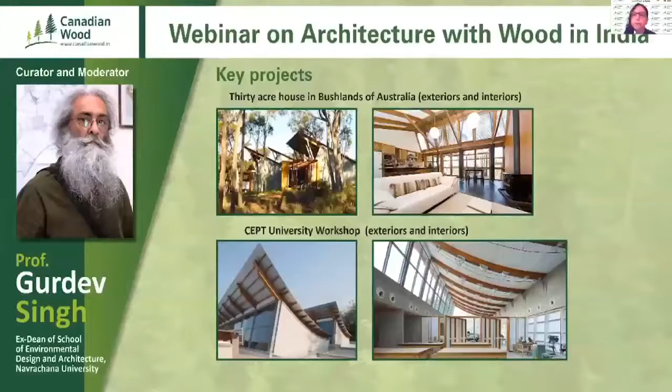Thank you, Pranesh. It's a pleasure for me to be the curator and moderator of this prestigious webinar with such illustrious personalities from my fraternity on the panel. Despite my engagement with Canadian Wood over past 5 years, it was very enlightening for me to listen to the address by Honorable Andrew Smith and note that thoughtful work is being done by Canada on sustainable forestry and growth of trade ties between Canada and India.

I, along with the registered audience, look forward to the very interesting next 45 minutes of highly informative presentations of 15 minutes each by the panelists, which will be followed by 30 minutes of panel discussion, and finally concluded with roughly half an hour of question and answer session with the audience.

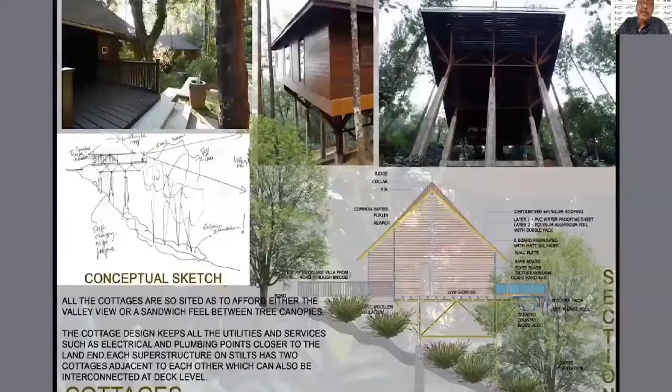You can see that this is made of Canadian wood, the softwood: pine, spruce, Douglas fir, and cedar. This is a project I did with Canadian wood 12 years back. All these cottages, as you stand on the deck, you are very near to the foliage of the tree. That is the beauty of this project, and that is why we won quite a lot of awards.

We got this timber from Canada into China, and from China into India. There was a stream, and I created this resort hotel with the central block spanning the stream as a bridge block. Probably this is one of the first projects in Asia where an entire 5-star resort hotel is on a bridge, so my footprint is not even 0.016 - the least among hotels in the world.

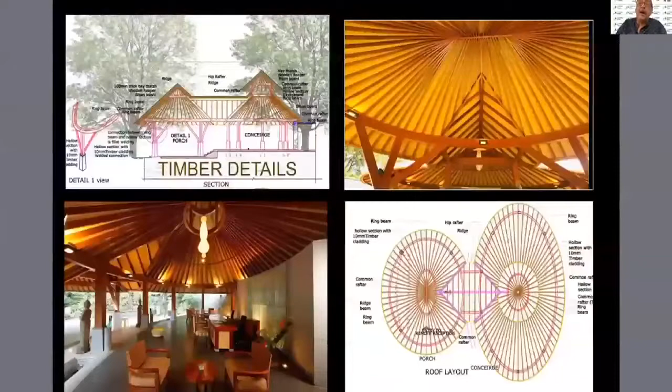In the cottages, you are very near the tree, very near the birds. That is the beauty of having softwood. You can again see the reception block here, and this is the internal of the bridge block. You can see a glass floor at the bottom - the bridge block spans like a bridge, with a glass floor for the restaurant and the lobby.

Now I come to the Tamara Kodai, which is a conservation project in 7 acres of land in Kodaikanal, Tamil Nadu. This is a heritage project, and we have got a lot of awards for this also, because it is a heritage adaptive project - not only conservation, but adaptive reuse.

I'm sorry, not pre-adaptive, adaptive reuse. We have conserved and reused it - adapted the conservation to reuse. So you can see that...

If you see the interior, we got all this timber pre-engineered and shipped from Indonesia, in Jepara near Semarang, and brought it here. We had to make 300 timber drawings, as you can see. In this project, we used antique finish timber, but this is not softwood, this is hardwood.

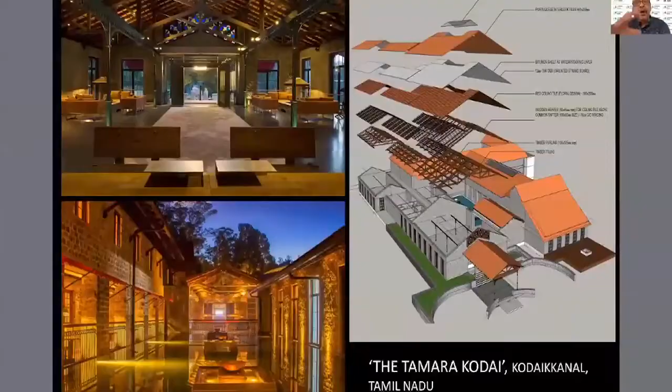And you can see the interior. This was a chapel, originally a monastery. In this Kodai project, we conserved a monastic building and made it adaptively reused - this was a chapel which has become a restaurant.

You can see that we tried to retain all the existing walls with lime plaster and retain the rubble. We have used a lot of stained glass to create the ambience.

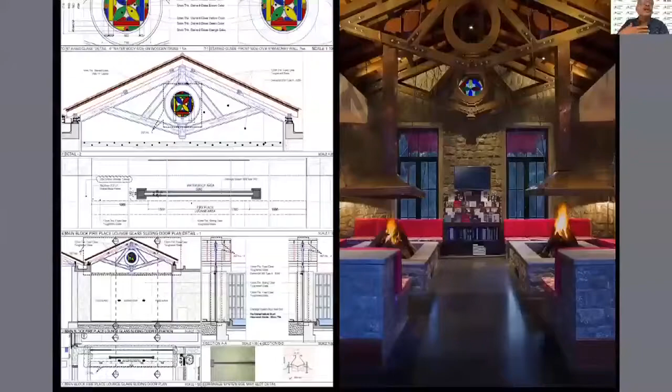What I'm trying to say is that this can be done provided we apply our mind on conservation, and conservation and timber are good cousins, because most conservation buildings are made out of timber. So I recommend all architects, clients, and builders in India to go back to timber, create light structures. Even a Western rich country like Europe or America is using timber. We in India are using heavy walls and heavy concrete or stone roofs. We should get back to timber.

That is my mantra. I will now come to the last item of my presentation - this is about using Canadian wood.

My wife, Lata Mahesh, is one of the world's biggest collectors of bells. Her hobby is collecting bells over the last 20 years, and this is the only bell museum in the world - in my garden, in my house. You can see a rock on the right side, with the bell museum at the foot of it.

This is the only bell museum in the world. You can see the Canadian wood - the FII gave us timber, and we built the entire museum with steel frames and timber. We used red cedar outside, Douglas fir and Western hemlock inside, and the framework was made of spruce, pine, and fir (SPF). This is a project where I used only timber - no cement paint, no wall, no masonry, nothing.

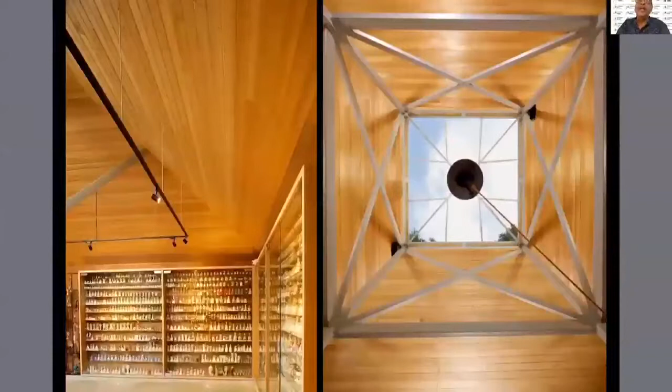We have also treated this with water-based polyurethane and termite control using Bayer termite control chemical, so I hope this will stay for 30, 50, 70 years. I may not be there, but my wife's Bell Museum will be.

As we all know, wood is God's own building material - renewable, sustainable, with a negative carbon footprint, and biodegradable. We in the Indian subcontinent have had a long historical tradition of building with wood, all the way down south to Kerala, the coastal belt, into the hills - Himachal, Bhutan, Nepal, etc. We have palaces, temples, and dzongs 400 to 500 years old. Now we need to revive this tradition all over again.

There has been a global resurgence of building with wood. The ecosystem for wood construction in India is now in place through educated vendors, structural engineers, and proof consultants. Building in wood is not only cost effective but also lightweight and easier to construct under adverse working conditions.

My presentation today is for the young architects and students aspiring to build in wood. We will be sharing our journey of design, the thought process, construction, and details in this presentation. For easier understanding, I have classified our projects under three heads covering various typologies: small span structures, essentially residential in nature; medium spans, which are institutional projects; and large span structures, 15 meters and above.

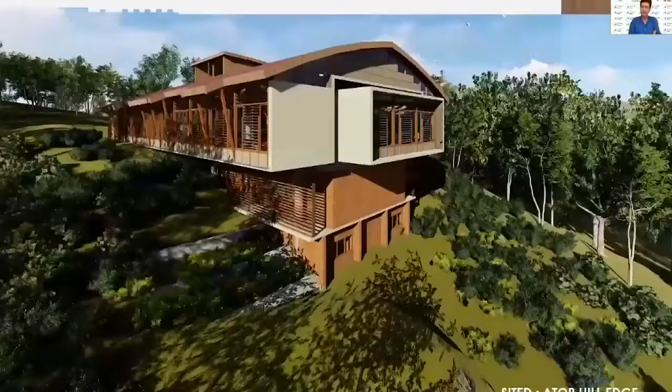This is how the building sits atop the hill edge, with two levels for the laundry and the kitchen below, and the main dining hall at the top. That's where timber lends a distinct character to the building.

This dining hall is for 600 plus diners, including 600 students plus teachers. Now, in contrast, I'll share the dining hall at the Royal Academy, Bhutan, which is a 30 meter by 75 meter structure for 1200 diners.

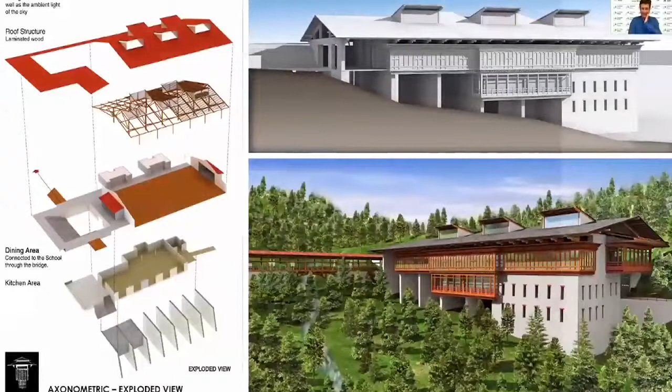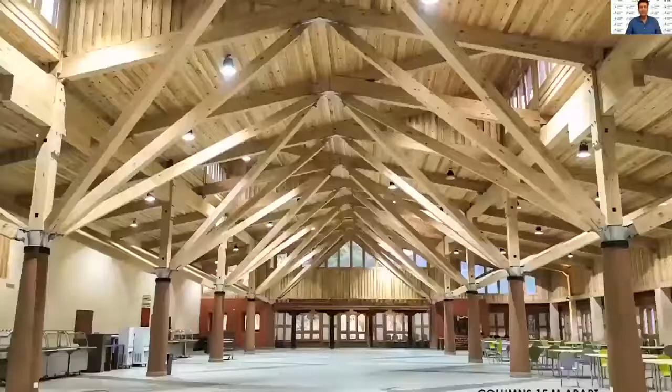Here we go ahead. Here is the service entry from the rear, and with the dining hall at the upper level, the main entry into the dining hall for 1200 diners. Here the columns are 15 meters apart, and also through the middle we take in the light.

The middle section of the roof also permits ventilation, and this twin level of height gives a very nice volumetric dimension to the space. There are 6 petals that hold the entire ceiling with one compression member, as you can see in the middle, holding the main beam.

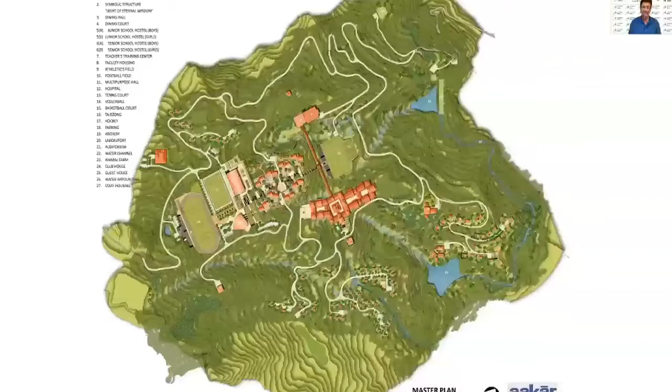Now the academic building at the Royal Academy, as part of the large span structures - here we have a 260-acre campus with all its components, as you can see on the site plan. An aerial view of the same campus under construction as we land into Paro Airport.

This is how the main academic core nestles in nature, atop the mountain ridge, with a suitable climatic orientation - the longer sides along the north and south. This is what you term as harmony with nature.

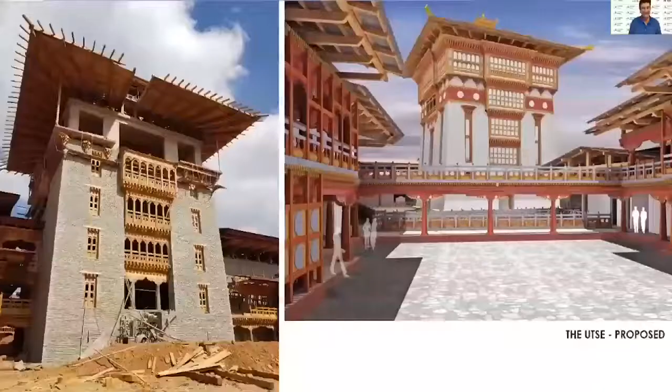Now, the main building, the Utse building, is 7 floors high at the core of the academic core. What you see on the right is the proposed Utse, while on the left is the building under construction. This photograph is about 6 months old.

And the build has surpassed our expectations. You can see the large oversized roof in engineered timber.

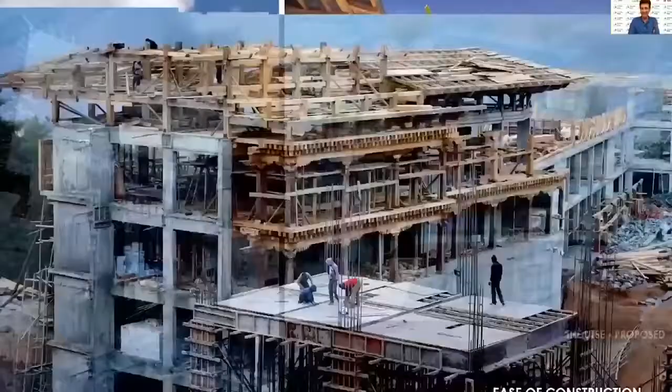Now I wish to emphasize the ease of construction here, where while the concreting has just got over, the roof structure is in place. The inner courtyards, corridors, etc. done in timber are all in place, while the podium concreting is in progress.

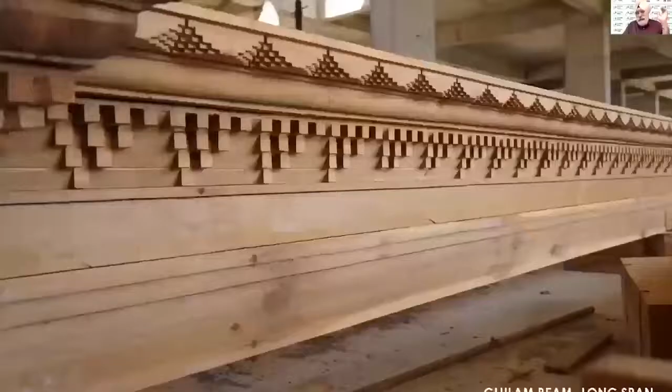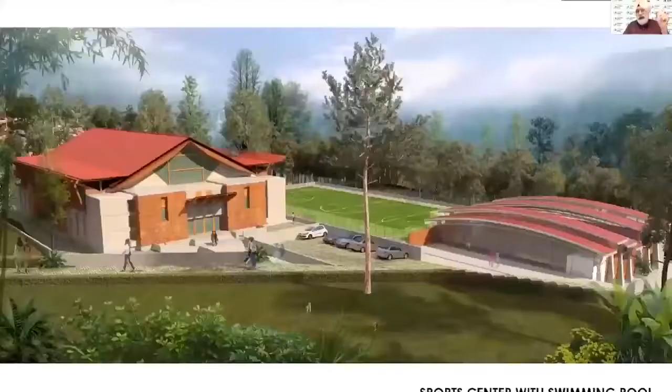Now I will come to the sports center at the World Environment School, which is a large span structure, 50 meters by 75 meters. In fact, we've designed two structures - we'll keep one for another webinar. I'll focus on the one on the left that we see as the sports center.

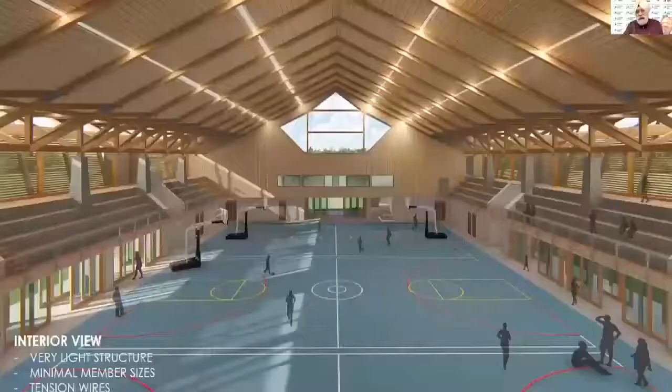Here there are some study models and the alternative study models that were proposed. Now you can get an interior view of how light the structure is with minimal member sizes and tension wires which are barely visible.

Acoustics and inbuilt lighting in a timber structure is never a challenge. It's very easy and helpful.

On the left, you will see the louvers. Here, the loose end of the truss has been used as a tension member to provide for these louvers, making it a strong architectural element.

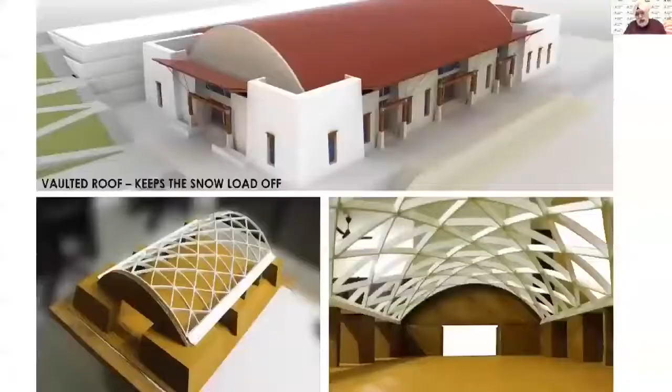Now, the multipurpose hall at Royal Academy, Bhutan, which is a 50 meter by 75 meter structure, again encompassing 3 basketball courts. Here we used a vaulted roof to keep the snow load off. Some study models of the lattice work that we proposed at the building under construction at site presently. This will give you an idea about the large scale inside space that we have.

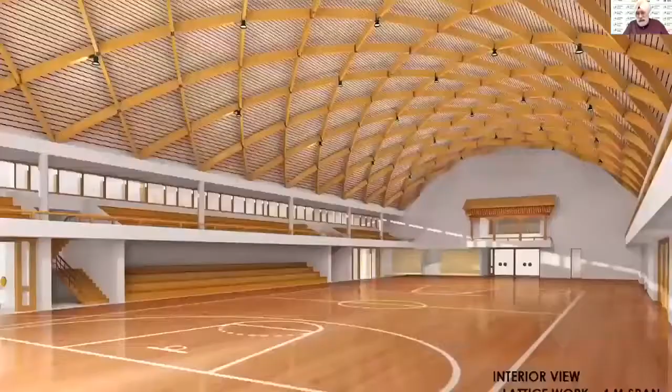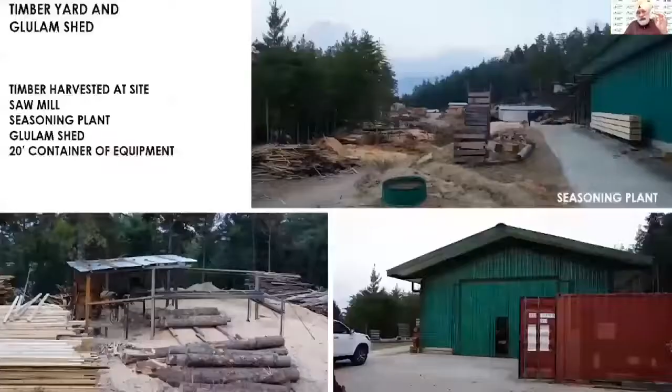Now, this entire glue lamination for the Royal Academy Bhutan was done at site. I will share the entire process of timber being harvested at site, to a sawmill, to a seasoning plant, to the glulam shed. All we got was a 20-foot container of equipment from Switzerland to help us through this entire glue lamination and engineered wood processes. You see the timber yard, you see the sawmill, and this is the inside of our glue lam plant.

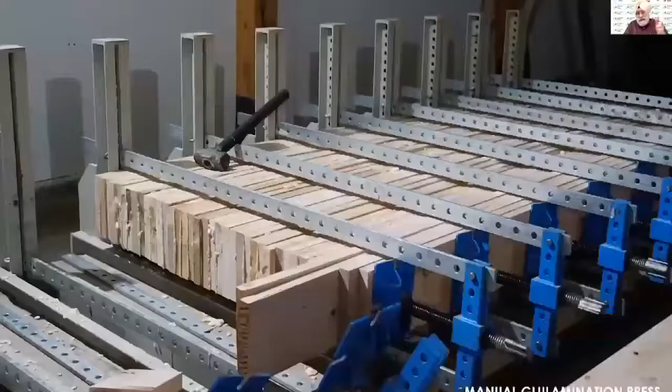This is a jig in place, all manually done, which also helped us curve. You can see the depth of the beam being formed, and we could do the curved members also here on the same jig. A very rudimentary humidity and temperature control mechanism with glues, etc. Here what you see is the members stacked for the multi-purpose hall with human scale. You will see the curved members that are there, which adds to the complexity of the multi-purpose hall with the steel connectors, etc.

Pine laminas, so beautiful, so aesthetic.

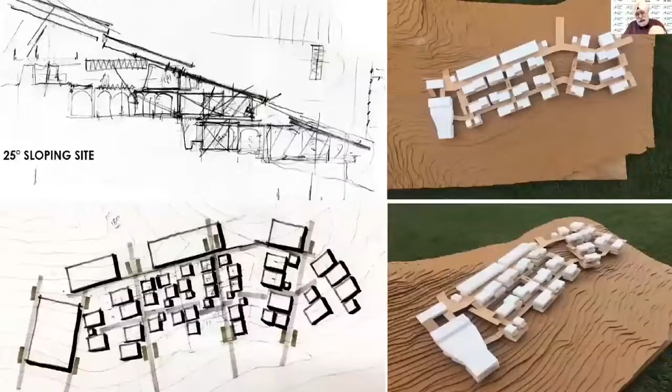Now I'll come to the medium span structures at the academic building at the World Environment School, a very contemporary gesture. This is on a 25-degree sloping site, very modular in units, classrooms, and models, and this will give you an idea as to the profile and the roof profile in section, where our slopes are south facing and all our roofs are south facing. We've taken advantage of this, minimizing the cut and fill.

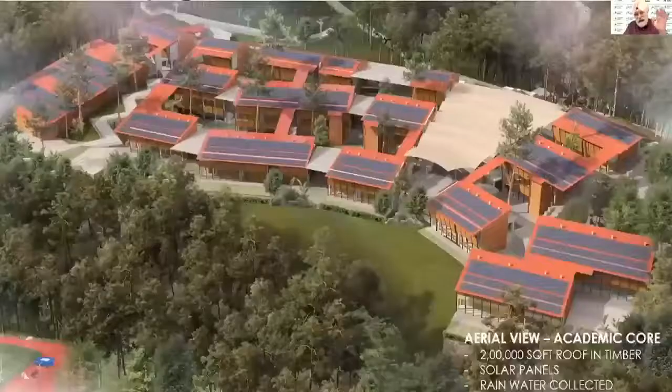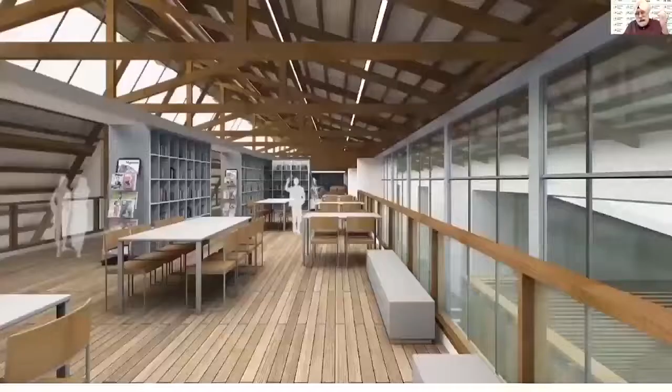This roof structure of our academic core is about 2 lakh square feet. It has enough solar panels for our energy needs. We collect enough rainwater for our annual requirements. This is punctuated with courtyards to save on existing trees. It also encompasses between building blocks a 1,200-seater amphitheater, again done in timber. Courtyards with timber louvers, the library with a long running north light all along the edge of the building.

The materials used essentially are two. One is locally quarried laterite along with timber, which give it a distinct character and an identity to the project. Here in this project, because the classrooms are all modular in nature, a 10 meter by 10 meter kind of a space.

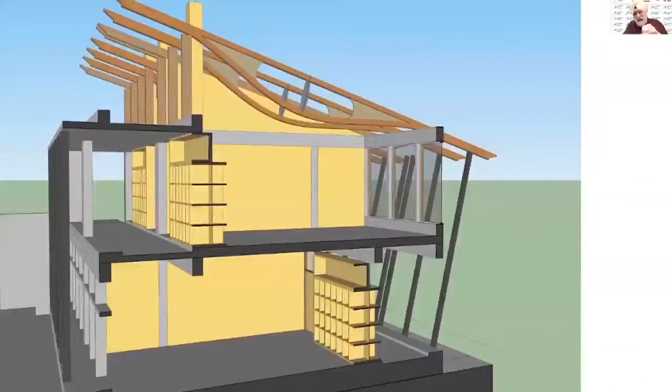So we developed a truss here with 3 meter overhangs on either side. Overall, it's a 16-meter long truss where the shear members are thicker in dimension, where the shear forces are at the edges, while the center takes a steel plate for the compression members. So we developed this truss which adds to the architectural beauty and interior spaces. It also gives a very distinguished identity to the project. Here what you see is an extension of the same truss spanning 20 meters across.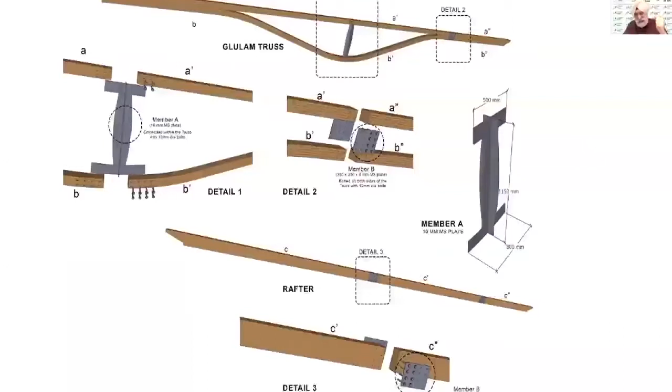Now these glue lam trusses that we were doing, we talked to our structural consultant. He wanted a sectional size of 9 inches by 9 inches in the middle and 9 inches by 18 inches at the edges, which we felt was very heavy and very visually not acceptable to us. Pushed to the wall, we decided to do a real scale model, full scale model at the office itself.

You can see the jig and the turn buckles where these two girls are at work making this truss. That's our team at the office, load testing and deflection tests being conducted on this truss. I am happy to share with you that we could finally get our structural engineer to agree on a size of 5 inches by 5 inches, thereby minimizing the component and bringing down the cost of this truss also.

Because 9 into 9 is 81 versus 25, which is 3 times the saving in material and components.

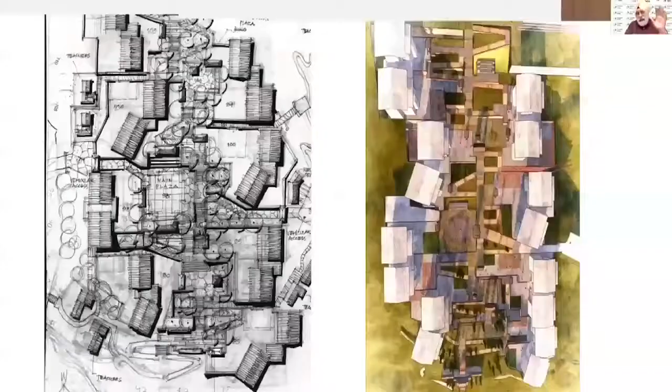Now I'll come to the student housing at the Royal Academy, Bhutan, which is a medium span structure. Again, a sketch of the site plan. This aerial picture will give you an idea about the site and the terrain, with the boys' hostels on one side and the girls' hostels lined up on the other side.

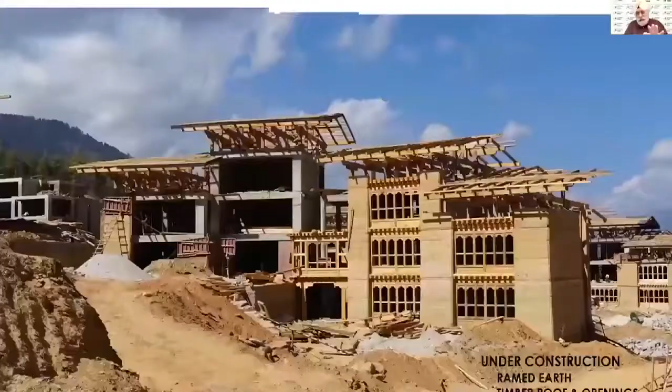Here, the study model indicates how we've negotiated slopes within a built block. That's the built block under construction, with rammed earth and timber roof structure with large timber openings. Engineered wood has been used for longer spans, while shorter spans are in lumber. That's the student housing finished, with a south-facing facade and large openings.

That's our block. It's a good local aesthetic with rammed earth and timber. Same blocks, boys' hostel, with the girls' hostels across the courtyard, the north side taking on the stone walls. This will give you an idea about the slopes that we've negotiated with each terrace for each two blocks.

Now I'll come to the small span structures, the last component in our presentation, which is the faculty housing at the Royal Academy. We had 120 houses to build on account of teacher training and curriculum development. So these have been split into 3 villages.

Here is an idea giving you a look and feel of one such village, with south-facing rammed earth walls and in-between spaces. We used stone walls on the north side, which also took the kitchen and all the services, with the rammed earth on the south side with large openings to again permit sunlight. That's a view of the large overhang roof, how it protects the balconies.

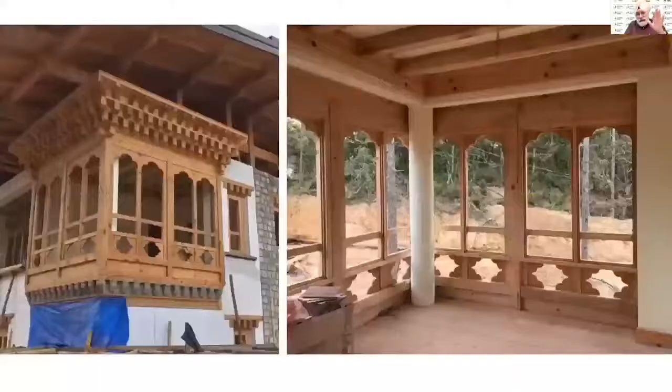Traditionally crafted large overhang roofs with its bells and whistles all in place. Now, this is green wood used on the exterior for carving as well as on the interior for spaces.

Now I'll share a CLT. This is a different project, the retrofitting of an office building on Annie Besant Road, Bombay. Here we used a 1.5 meter panel cut along this profile, as you see, A and B as a negative and a positive profile.

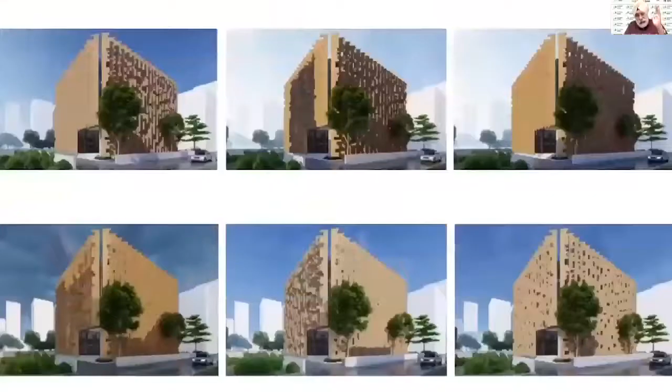The positive profiles help keep the sun out, while the negative profiles are on the favorable side, that is the north and the south. This is how it will help you understand how the shading devices work, while these louvers give shade while letting the views and vistas come through the building.

Now, our journey of timber began with this house in Himachal at 7,500 feet. This site overlooks a valley and a village.

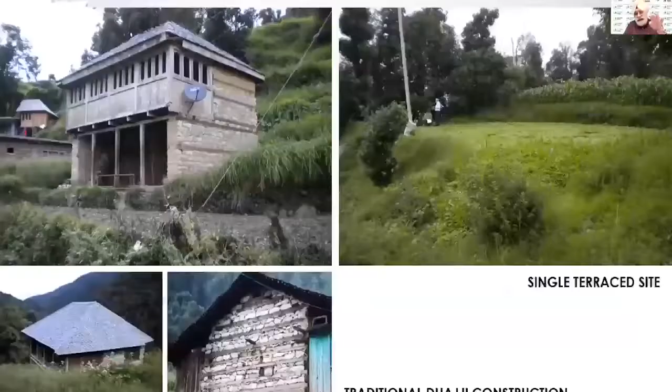These houses are the houses in the village, done in the local Dhajji construction, with thick stone walls laced with timber to make them earthquake-proof. That's our site, a terrace on the right. This is our house, built along Dhajji construction.

We have two large south-facing dormer windows, 3 meters in an equilateral triangle dimension, bringing light deep into the house. The two gable windows also help us bring in more light into the house, with the verandas that surround it.

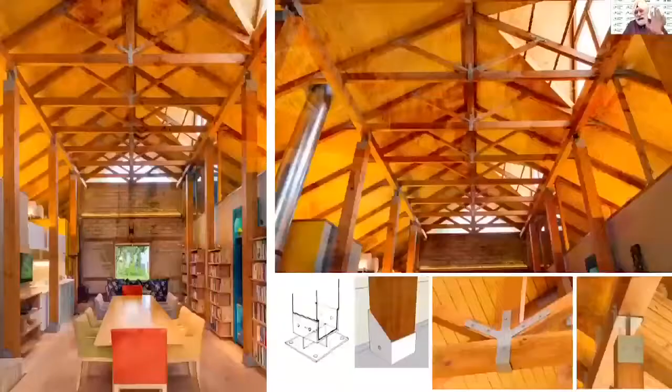This house is essentially a post and beam construction where the roof is floating and does not touch the walls. To emphasize this, we have the columns coming out of steel shoes, and they are detached from the walls, kept free from the walls.

Local construction and timber details, as you see. Thank you so much. This has been our 6 to 8 years of journey into timber. Thank you.

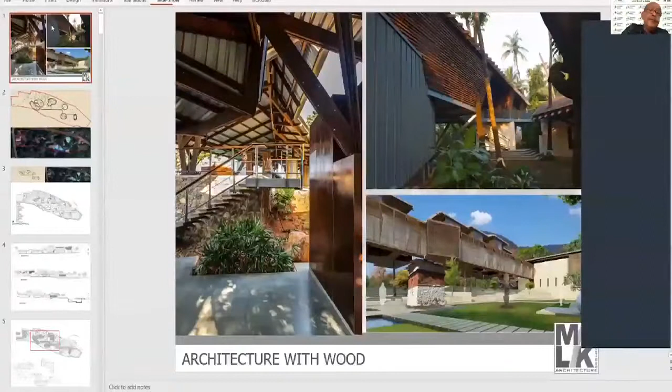I think with wood as the subject, wood is synonymous with the tree, with the forest, with nature, and that brings us to man, who is an intrinsic part of nature, something we have forgotten. My entire childhood up in the Himalayas was my bonding with nature, and that's always been my guide.

I firmly believe, and as I grow older this thought is reinforced, that I become more and more a catalyst than a doer. I would go to a site, I observe, I watch. I also go with reverence to nature, saying please guide me.

So I will run you by a few projects. They are diverse, and also in zones where traditionally wood has been used. In all of them, whenever we go to any particular site, we have a full matrix of understanding the past — not only the materiality but also the sociology, the climate, and so on. We learn from that, but our response will be very contemporary. My guru would always say, and would get unhappy if he found me repeating something, 'you please go, this is your own journey, and that's it.'

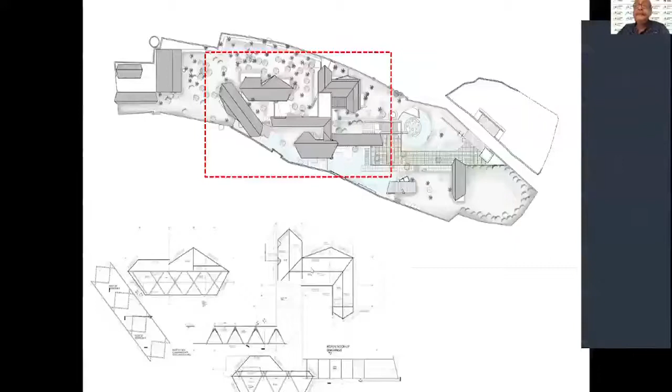Detailing — understanding tradition, as I talked about. You have Mangalore tiles used in the Konkan area for centuries, beautifully used top and bottom with an air cavity in between, but the wood member used is only one. So there was no need for me to reinvent something that has been going on beautifully for centuries.

You have to take care of the slopes, which is very important — a common mistake people make. But after that, we started to be inspired by the tree itself, by the trunk and the branches, which led us to see how we could support this roof, quite conformist otherwise, with a structure more representing the trunk and branches.

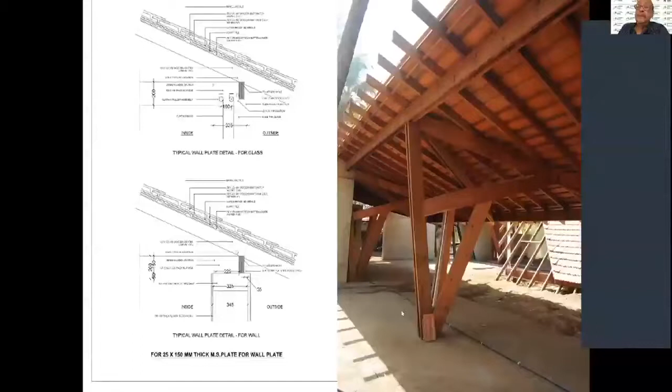You can see more details as to how this process moved on, and the working details. Now also how light manifests itself by placing glass bricks in place of some of the removed tiles.

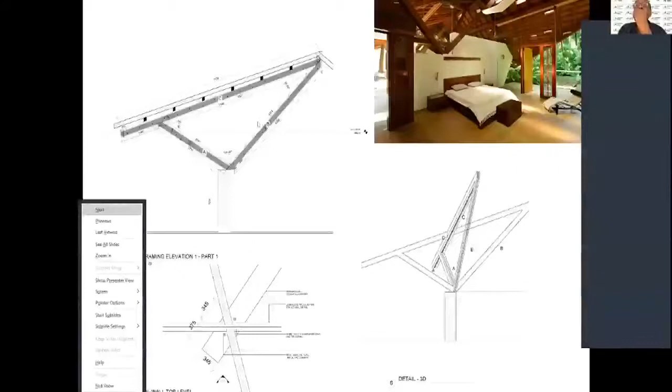Now you can start to see how this structure begins to manifest. At one point, on the right, it's almost touched the ground. It's wonderful when it's raining outside and there is wind — it's a wonderful shelter for you to be outdoors, bone dry, and yet enjoying the landscape.

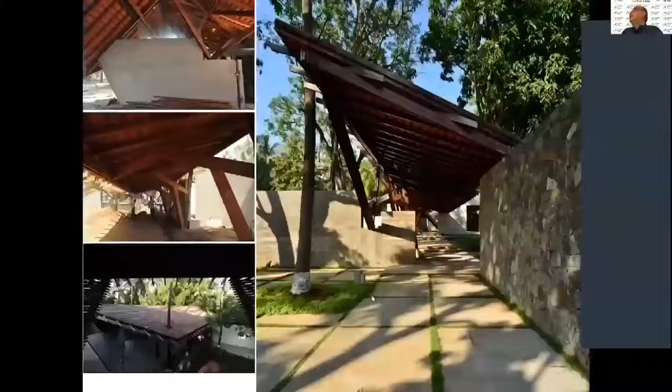You can see how the trees puncture through the roofs and so on.

Also, use of materials. Where we felt we needed to use an exposed concrete wall, it's been shown as exposed concrete. Where it's wood, it's shown as wood. So really an honesty in terms of use of materials.

Now the gym, as you can see, is a very contemporary element come into our lives. It has never been there before. So we thought, let's place it as a piece of sculpture, have a little bit of fun.

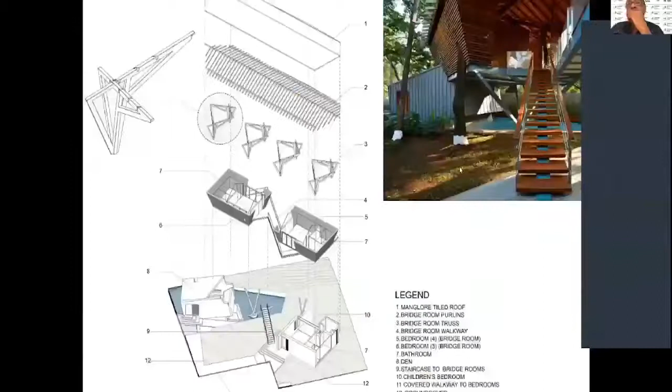You can see how the geometries work here.

We can jump to project number 2, which is Lonavala, very close to my house there. It's a beautiful hill, very close to Morgiri Fort. There are 6 of Shivaji's forts here and 3 Buddhist caves.

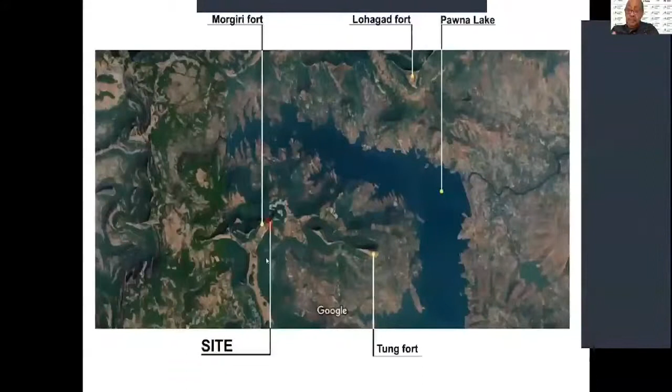The site is a plateau with slopes on both sides, but extremely steep and completely wooded. It's difficult today to even walk through it.

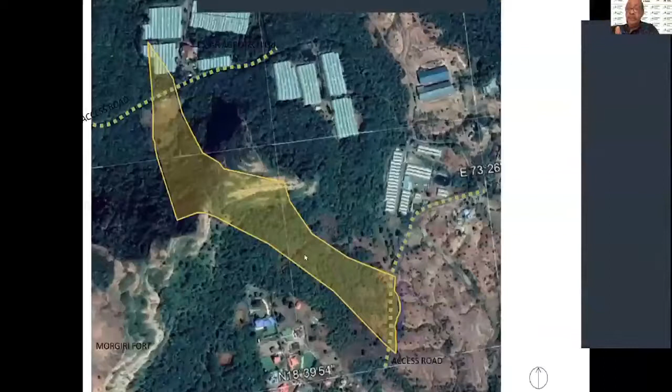To contemplate building there without cutting any roads, without doing retaining walls, without desecrating the hill. My horticulturist told me the topsoil is not more than 4 to 5 inches, so even if you remove the shrubs, erosion will take place.

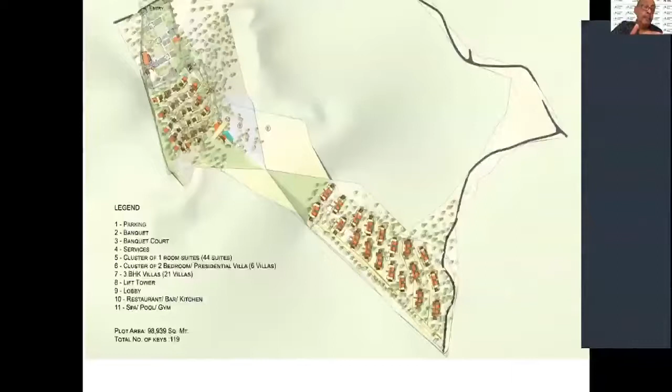This is where the architect starts to become very sensitive of things at an early stage. You can see how steep the site is. So how did we try to resolve this issue of constructing?

The process of construction ultimately becomes the area, the way the guests would move here. So we've given an elevator stack, very much like you would do for a 16-storied building. At floor 4 it stops, 8 it stops, 12 it stops, 16 it stops. Then with bridges, you connect to the rooms at that particular level, which are hoisted off the ground. You will see that in a subsequent study.

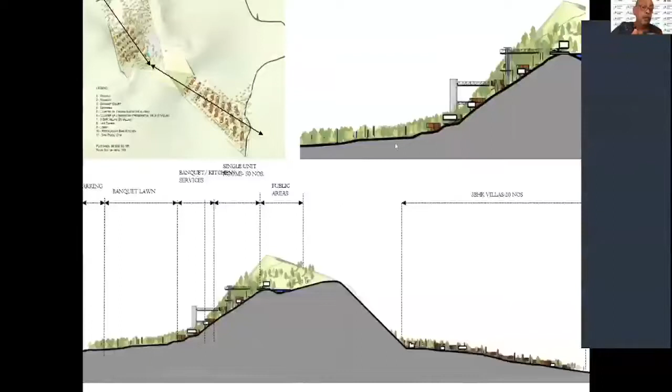So that's where it is. You connect this with bridges used for construction and ultimately used by the guests.

Now you can see this is how it ultimately would look. The underside of these bridges have actually been pre-ducted, which means all my pipes, sanitary pipes, water pipes, electrical cables are already pre-done and will be connected into these units. It almost becomes a Lego assembly.

Here we've been helped a lot by the engineers of Canadian Wood, and the status of the project is that one of these mock-ups is going on in a workshop, and we intend to bring these and assemble them on site. That's the program. You can see the detail, the working drawings.

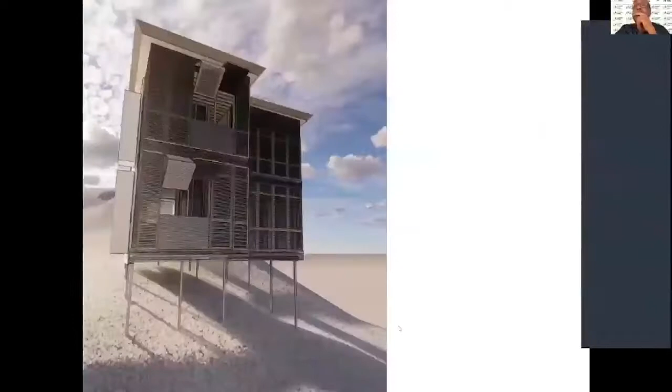Now we jump very quickly to Bhutan. You already had some experience with Bhutan. We have 4 projects there, 3 of them are resorts, and 1 of them is a community housing scheme. So I'll run you through the resort at Paro.

It's a beautiful site. It's on the river, and you can see the river there and some pictures of the river. Absolutely picturesque site.

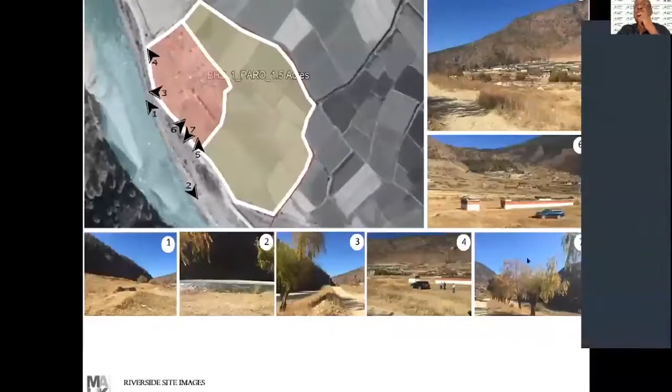Now that's the actual picture of the river, and that's our response with the architecture, with wood and rammed earth. We've used 2 materials which have been used in Bhutan, rammed earth and wood. The only thing we've tried is to again change the syntax by going totally with wood. So instead of getting the typical response that they have to the architecture there, we have modulated that, altered it to an extent whilst maintaining the elevation features that they require.

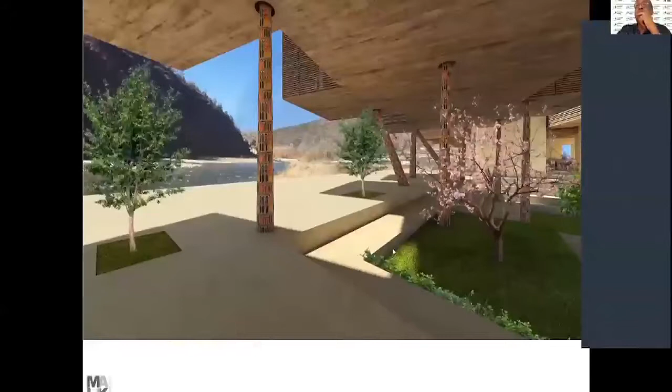Before that, they don't give you any clearance. Now you can see here that we wanted the ground to be completely free, so every guest can actually see the river as they encounter the hotel, as they enter it.

Here I was inspired, being in Uzbekistan, in a mosque where there were 1,100 columns, which were entire trees. Here it is. The mosque was burnt down by Genghis Khan, so each of the villagers brought one column.

And you can see it's almost like a toothpick, the slenderness and beauty of these. That inspired me to look at this as a forest, a concept of supporting these blocks which are suspended in the sky. Yeah, that's how it works. So inspiration sometimes came from Uzbekistan.

Now this is the rammed earth concept, how we are working with rammed earth. This is an old chorten on the site, which is being preserved. So there is this balance between what was and what is, and one does pay respect to what was. Next, this is the plan.

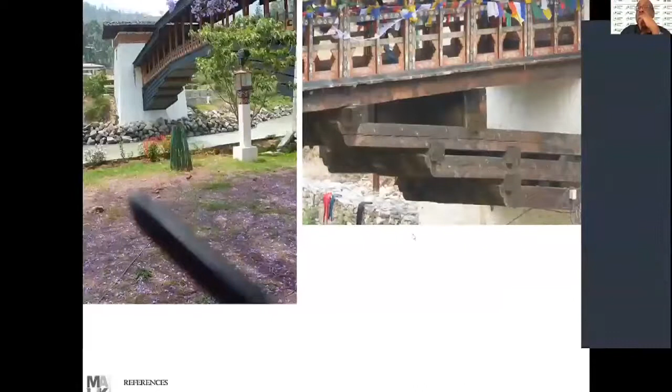These are some of the inspirations. You see how they did a bridge, you can see it left and you can see it here. Then when we did the lobby, I told my engineer, this is how I'm going to use the supports. It's very contemporary, this is all rammed earth. This is wood, but you see how the supports can be designed. So we changed the typical language whilst using the same materials.

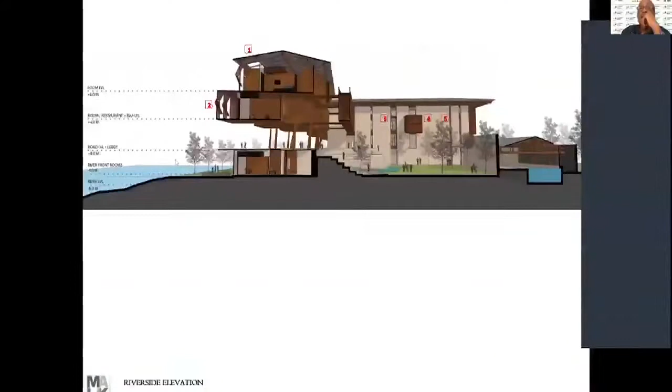This is a section which shows you the river, the lifted blocks, and the rammed earth. This is how we've dealt with the elevation, trying to deal with everything in wood.

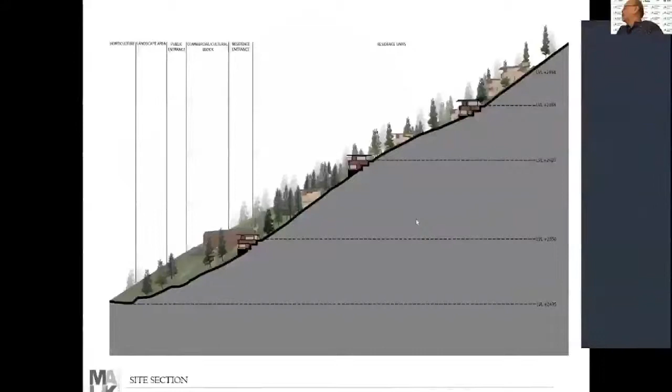I conclude with—no sorry, there's one more project. This is a housing that we are doing, a very steep site again, 30 homes and a community center. You can see how steep this is. Here, self-reliance, self-sustaining—which means we have the earth which comes out of the cut and fill, and then we have the wood, period.

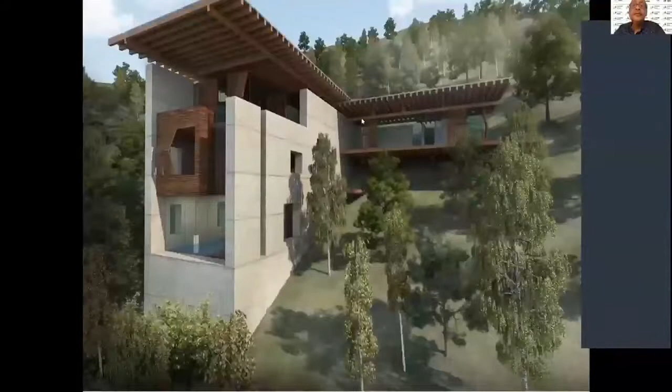And that's how this will look. They are all 3 to 4 bedroom apartments, done at 3 levels as they cut through the slope. And then you have these typical elements which are required there. That's how it looks—the living dining, the horizontal space, and the 3-level vertical space.

Yeah, you can see how the wood has been kind of used. That's the actual river down there.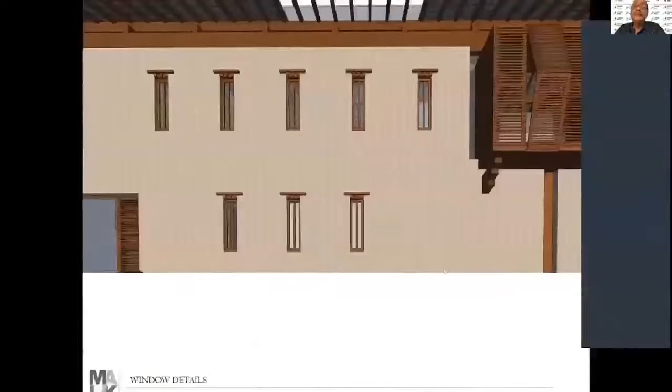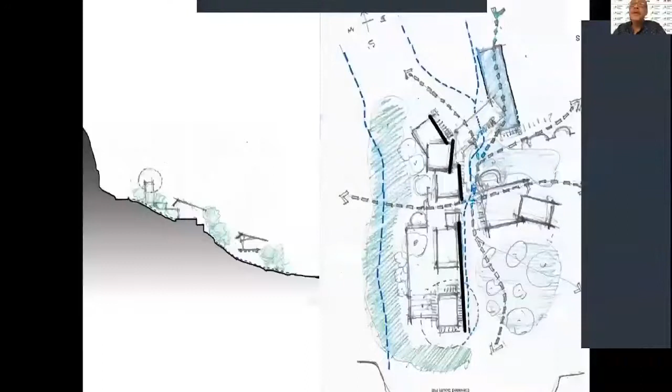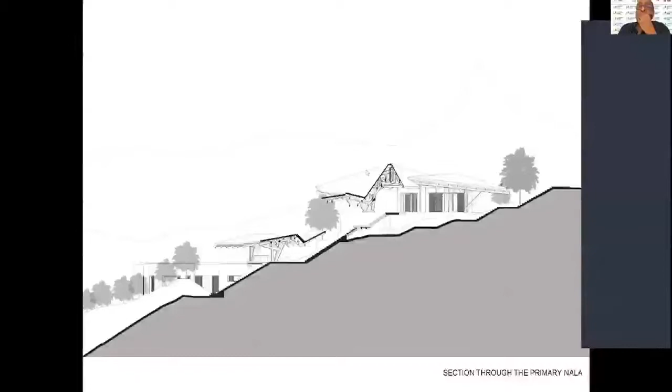Because of the steep slopes and the fact that we wanted the roof to be connected, so that in the rains we didn't have to run out to another room, the geometry became immensely complex. That meant even though we wanted to use kaula tiles, we could not, because you can't cut these ceramic tiles into all kinds of shapes. So the roofs became zinc because of the function.

You can see how it starts to work down the hill. You can see the complexity of roof forms, but this is happening only because of topography—not because I like it or somebody else liked it.

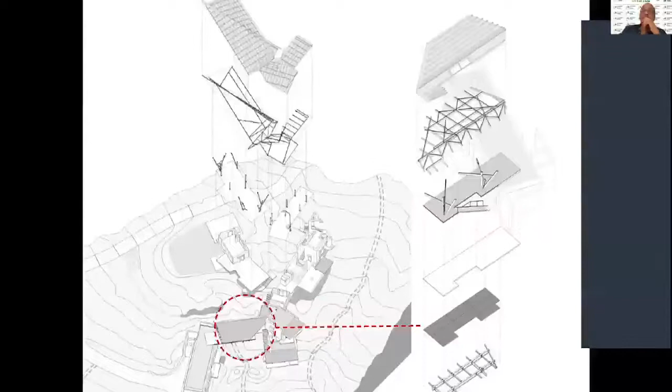Now you can see how these complex geometries formed and how they intertwined, how the support started to happen. Lessons learned—the quantum of steel we used here as composite became half of what we had in the first house. Next, now you can see some of the images, some inspired by the forts of Shivaji.

Okay, thank you very much.

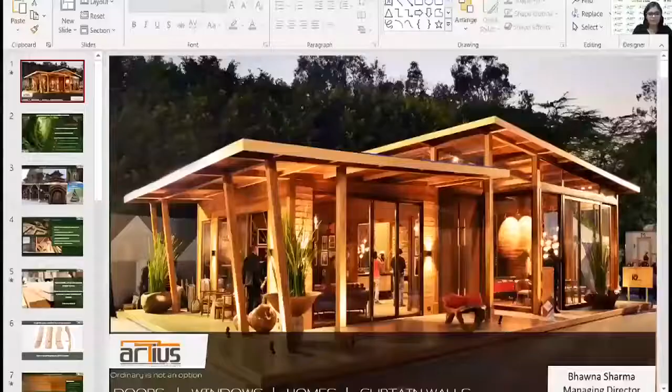Thanks, Nirmala, for introducing me and having me here this afternoon. I would like to start by saying a big thanks to both ICBC and the Canadian Wood for organizing such an informative and thought-provoking session by some of the most renowned architects of the country, and especially for inviting Artius and me to be a part of this virtual forum today. It's such an honor to be here among such industry stalwarts, most importantly because Artius is truly motivated to build green and inspire everyone to build healthier built environments.

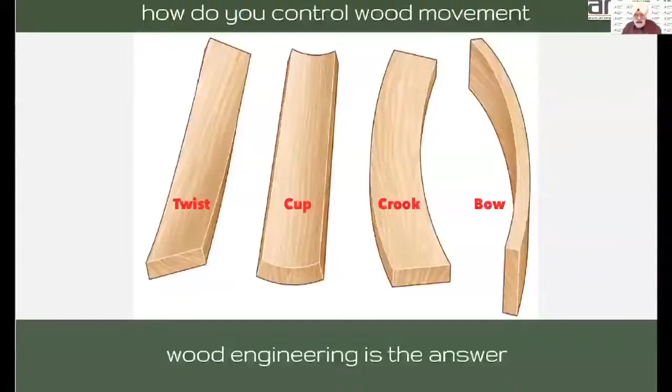When we started Artius in the year 2011, we realized that timber was widely in use in our country, not only just to make furniture or doors and windows, but structurally, and it could last centuries. But unfortunately, it lost the charm because it could not cope up with the growing needs of the building and construction industry, largely due to lack of research and technological advancements in our country. Some of the key concerns were unavailability of graded timber, longer spans, and expansion and contraction in particular, which could not be addressed unless we use certain modern techniques of timber engineering, one of them being glued lamination.

Glulam is a technology wherein multi-layered lumber is glued together in a manner that the grain directions are opposite, and it counters the movement. And that is what we started doing in Artius since our inception.

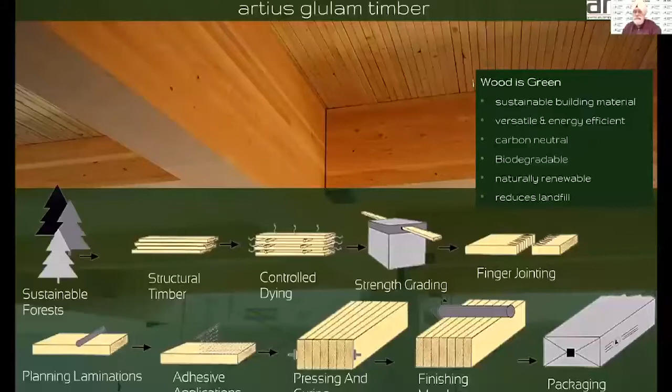Mass timber offers enormous advantage and it outweighs any other building material because it is sustainable, infinitely renewable, the construction is quick and dry, and it offers remarkable aesthetics, exceptional fire and earthquake resistance.

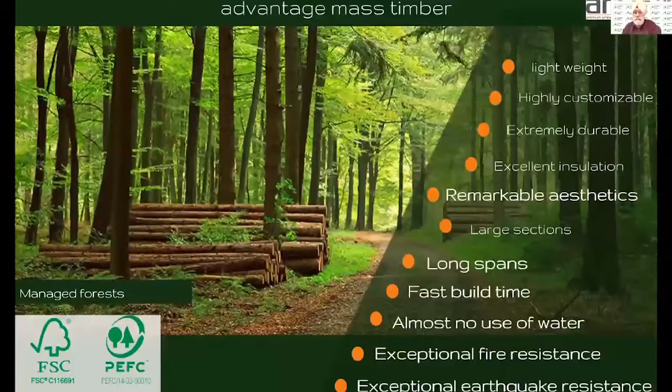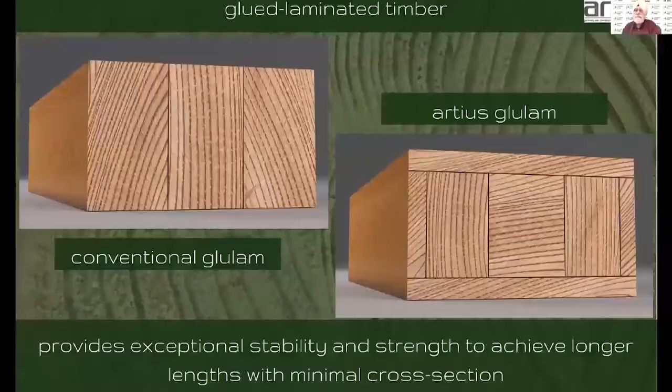But you know, it was like running a marathon for us at Artius to narrow down to the right techniques and methods of glued lamination so that it is able to withstand the unique weather conditions we have in our country, and other conditions like termites, etc. But now it's been 9 years and we've been successfully doing it.

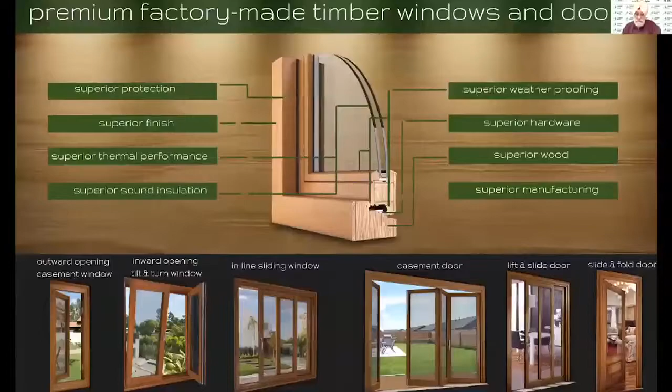We have executed more than around 300 projects where we have installed Artius glulam timber window and door systems in high-end residences. Coming on to post and beam construction was a natural progression for us. Today we are capable of doing everything from a small rooftop structure to a premium residence with great interiors, or maybe any iconic structure with tall timber curtain walls.

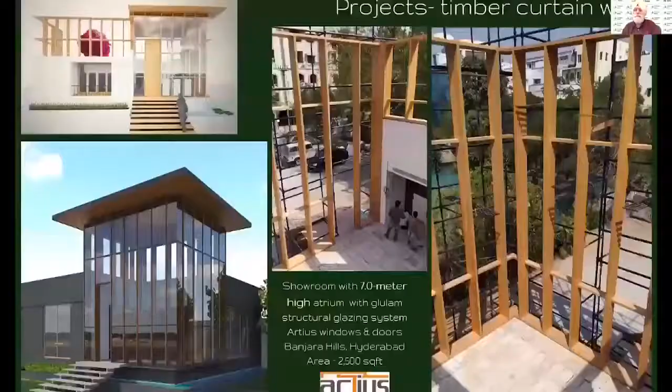And all of this happens in our research state-of-the-art manufacturing facility. Today, through this platform, I would like to invite whoever is interested for a factory tour to see how mass timber is being utilized to build building products.

I would also like to convey to all the architects that you guys design and leave the rest on to us, so we bring your design to reality. In fact, Artius is investing and trying to develop the entire ecosystem so that it's absolute peace of mind for you guys. We also assure you that Artius will keep innovating and investing in newer technologies like cross-laminated timber and other engineered products so that we are able to match the growing needs of this industry in our country, while parallelly expecting a lot of encouragement and support from the fraternity.